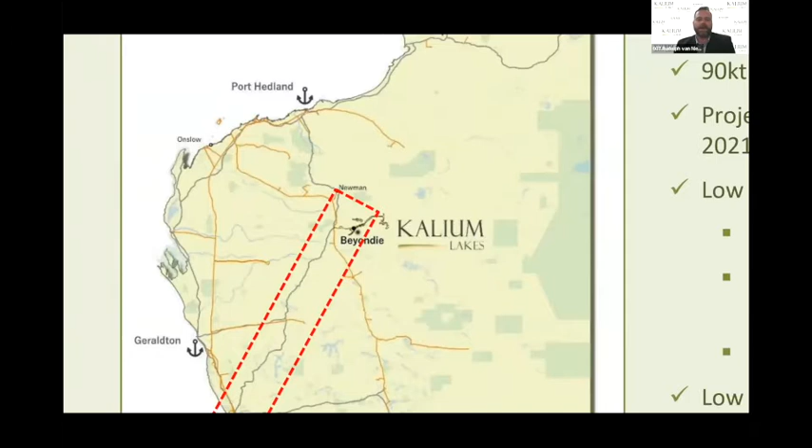So the Beyondie SOP project is located in Western Australia in the eastern parts of the Pilbara. It's located just 180 kilometres south east of the mining town of Newman, and it is also in close proximity of the existing Great Northern Highway and the Goldfields gas pipeline.

Phase 1 of the project, that is looking to produce 90,000 tonnes per annum of SOP, is currently in construction, on schedule and on budget, 70% complete, looking to have first production during Q3 of next year. That means Kalium will be one of the first producers of SOP and potash in Australia. The Beyondie SOP project is a low-cost, high-margin, long-life operation.

Just double-checking, you can see that, a long-life operation with an all-in sustaining operating cost of $200 per tonne on an FOB basis. That means it will place us in the lowest quartile of all potash producers globally. Phase 1 of the project has got a pre-tax NPV of $364 million, which will increase to over $600 million once we start developing Phase 2, which will double production. Both of these phases are underpinned by plus 30 years of ore reserves and mine life.

The project's also fully funded and includes a very attractive debt package of about 4% interest rate over a 10 to 15-year loan tenure. We also have an offtake agreement in place with K+S. K+S is, outside of China, the largest potash producer globally, and also provides more than 60% of the SOP consumed within Australia. So K+S will be looking to supply the potash produced from the Beyondie SOP project to local Australian consumers, New Zealand, and other strategic markets globally.

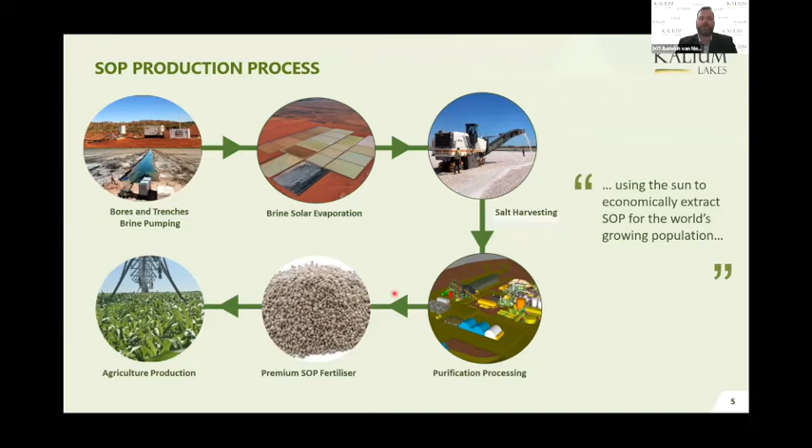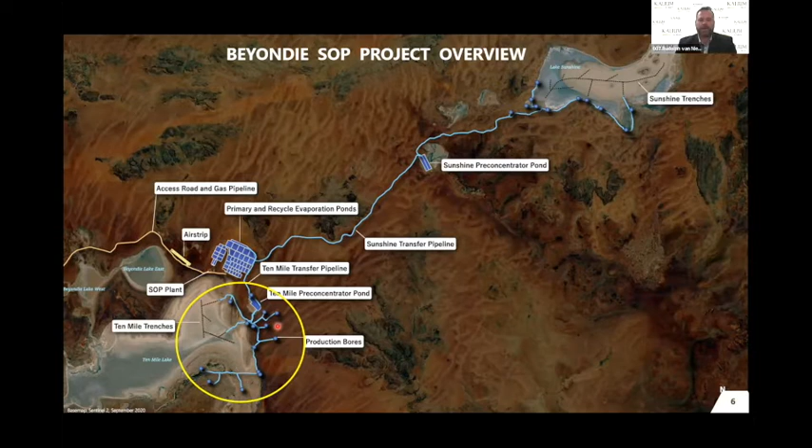To give a bit of sense of the scale, these areas are about 20 kilometers apart. So if you're in Perth, that'll be the same as the distance to Mullaloo, Sydney to Cabramatta, Melbourne to Ringwood, or Brisbane to Logan City.

The brine is then pumped from these pre-concentrator ponds to the main primary and recycle ponds areas, where we have our SOP purification plant, our airstrip, and access to our road to the Great Northern Highway, and also the Goldfields gas pipeline.

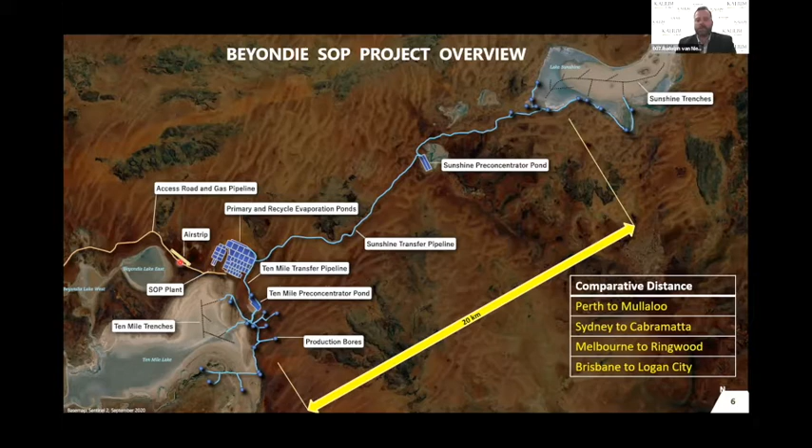Earlier this year, we announced that we've completed the 10 Mile brine extraction system, and only a couple of months ago, we also completed the Sunshine brine extraction system. This means that we've now commissioned all of the bore fields and brine extraction infrastructure required for the production of our 90,000 tonnes per annum of SOP.

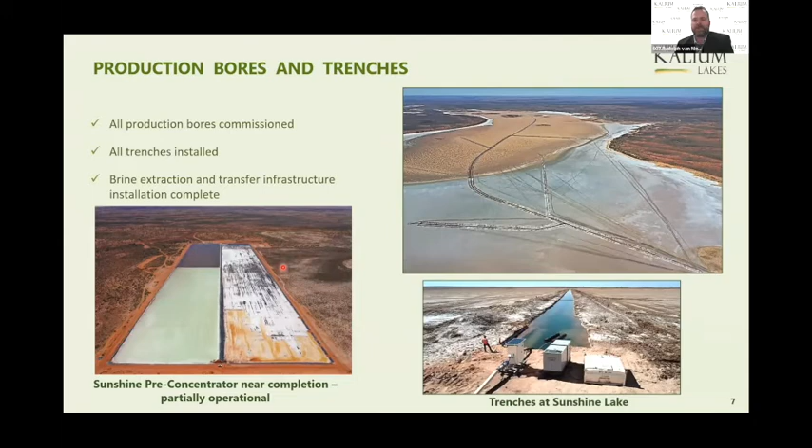As you can see in the slide, we've got the surface lake, the 17 kilometers of trenches on Sunshine, and you can see in the bottom slide what the typical Sunshine trench pump station setup looks like, with a fuel pot, a generator, and a flow control panel. The brine from this area is pumped into the Sunshine pre-concentrator pond area, as you can see on the screen, which is 30 hectares of lined pond area before it is transferred to the main pre-concentrator pond area.

We've pumped more than 44,000 tonnes of SOP from our bore fields into our evaporation pond system, and construction of the pond works is ongoing. We've also received delivery of our harvester, which has been commissioned and is currently undertaking preliminary harvesting works for our operation.

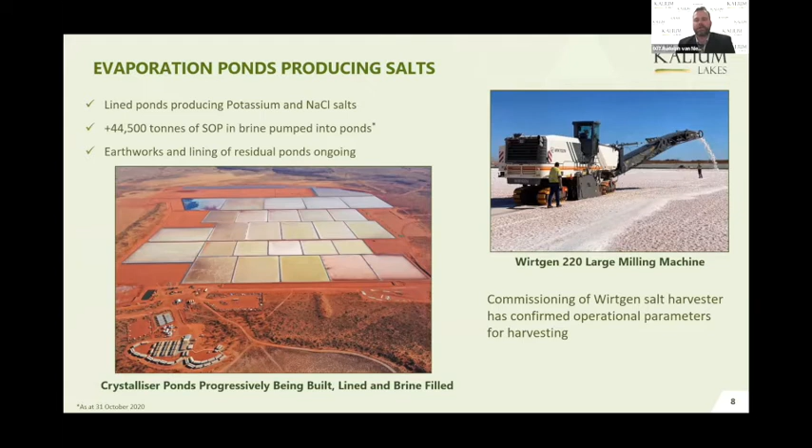You may have picked up that I keep talking about primary and recycle ponds. Why is that important? Well, the primary ponds receive the brine from the bore fields and then produce the salts that go through the purification plant, while the recycle ponds, as you can see in pink here, receive the brine from the plant itself.

So the plant receives salts and produces three products. It produces SOP as a premium grade product, it produces sodium chloride as a waste product, and it produces a mother liquor containing potassium minerals that is then recycled through the plant or through the ponds to recover the remainder of the potassium.

The 340 hectares we've got there is just overlaid over Melbourne. Again, for a bit of sense of scale, you can see the MCG and Melbourne CBD. And you can also see that we are currently at 77% completion of our primary ponds, looking to have them all completed before the end of the year, whilst the rest of the recycle ponds will follow as we get closer to commissioning of the process plant.

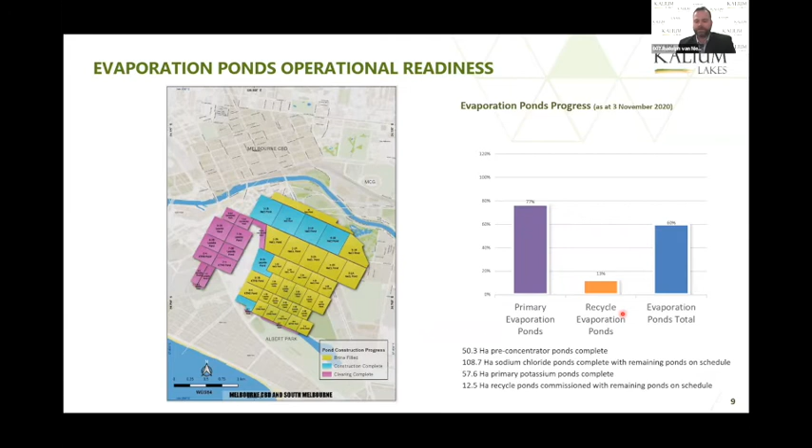We have all of our non-process infrastructure complete as well. That includes 216 village, access roads, administration facilities, warehouse, workshop, laboratory, diesel fuel storage, and an airstrip. All of these facilities have been built, commissioned, and are in operation.

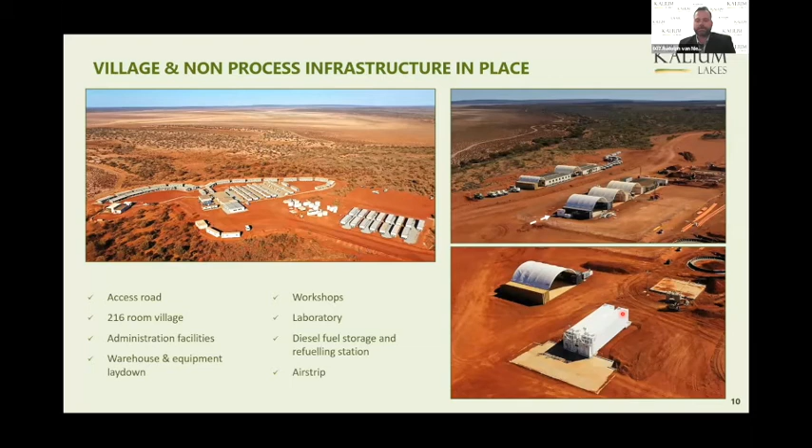The heart of our process is the purification plant, and given that we are first movers in the industry, we also have had the challenge that there isn't necessarily local expertise that can design, produce and supply these process plants. So we would like to say we haven't left one stone unturned to find the best people in the industry who know how to build these plants, and we found the Germans, who can design, supply, and have proven and tested the technology of the plant that's being built on site.

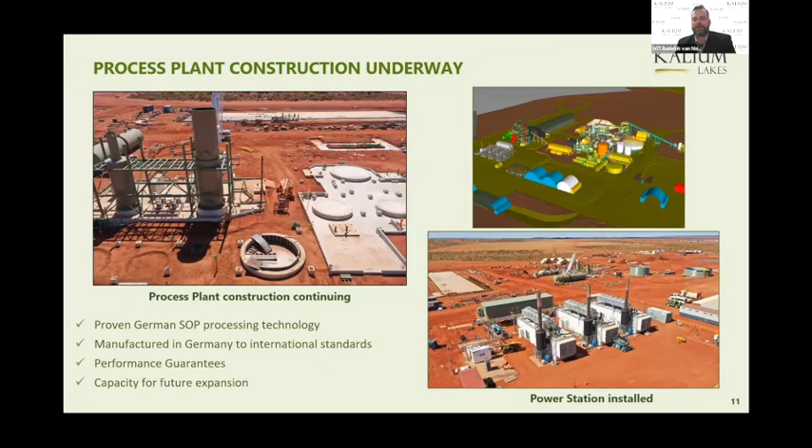This work is almost complete, and we'll be looking to have the delivery station also completed by the end of the year, which puts us well on schedule, slightly ahead of schedule for commissioning of the power and gas system in the early parts of 2021.

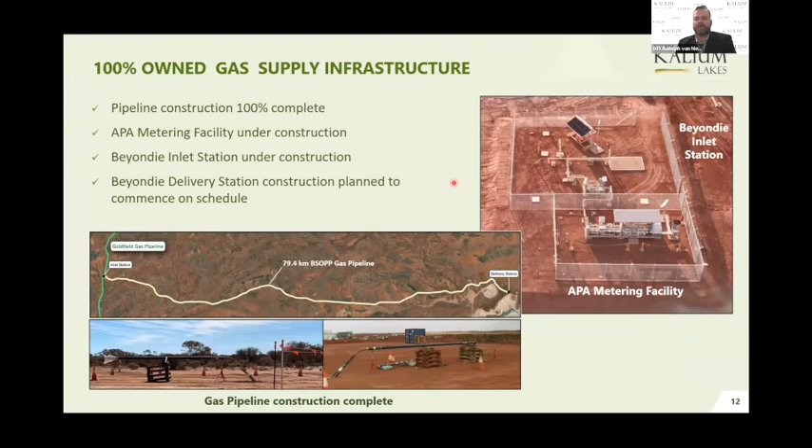Quick note on schedule. I've mentioned we're on schedule, on budget, and we truly are. All of our engineering work's about complete, and all of the other activities are well on schedule. The gas pipeline construction, as you can see there, has been completed slightly ahead of schedule. So well and truly looking to deliver our first product during Q3 of next year, and potentially, if we can, pull it a little bit forward.

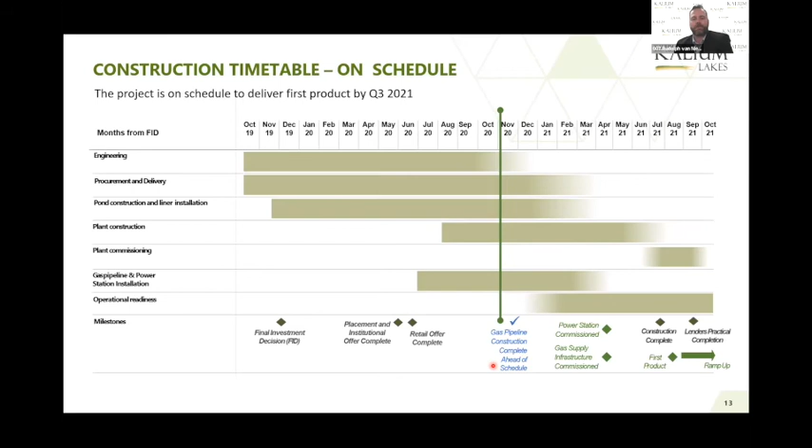We will also continue to look at upside opportunity. So once the plant is commissioned, we will be working on debottlenecking activities to increase production through the plant and the evaporation pond system from 90 to 100,000 tonnes per annum.

The key area of focus to access the brine and the resource for this is our recently acquired tenement at 10 Mile West, where we have increased our resources by almost 6 million tonnes at a grade of just over 17,000 milligrams per litre of SOP. The approvals and exploration work for this area is ongoing and is anticipated to be well in place by the time we start production of phase 1 for the project.

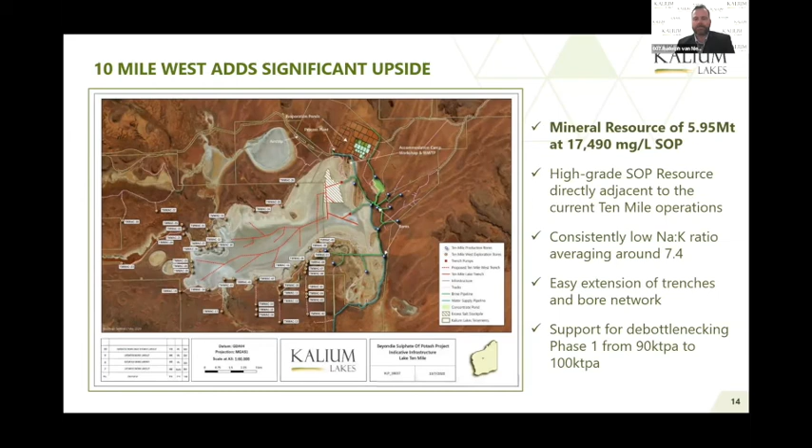The project also includes significant upside. All of the work we've been talking about so far, phase 1 producing 90,000 tonnes per annum, and phase 2 that will be doubling production, sits within stage 1 of the project area footprint, which means that we will produce up to 180,000 tonnes per annum within this area, but we still have all of stage 2 as the upside for future expansion or the blue sky.

And to put some sense on the scale of what this paleo channel looks like, it's the same as the distance from Perth to Busselton, Sydney to Orange, Melbourne to Warrnambool, Brisbane to Maryborough, or Adelaide to Renmark. Within the stage 2 area, we also have the remaining 79% of our available lake surface area. So it provides for substantial upside in the future, as you can see.

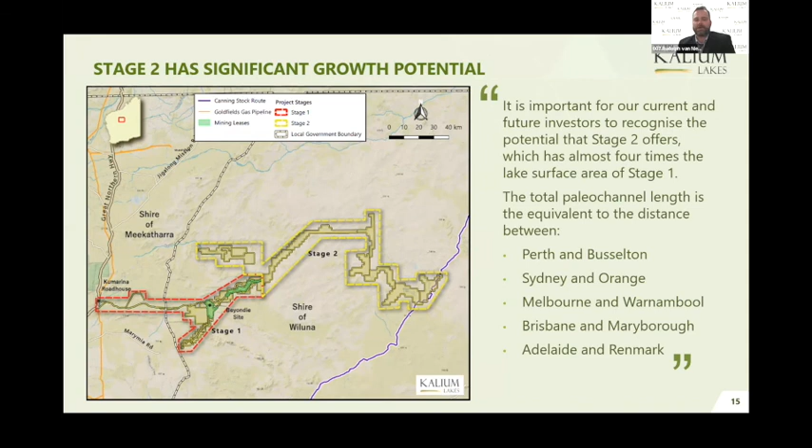So to wrap it up, hopefully we've made up some time. What Kalium is doing is we're building a leading specialty potash business that will have access to the new Australian industry. It's leveraged to the feeding the world thematic. We have first production in less than a year. It is a low-cost, high-margin, long-life operation with more than 30 years in reserves. It'll be supporting Australian farmers' potash needs, and it's got significant project upside.